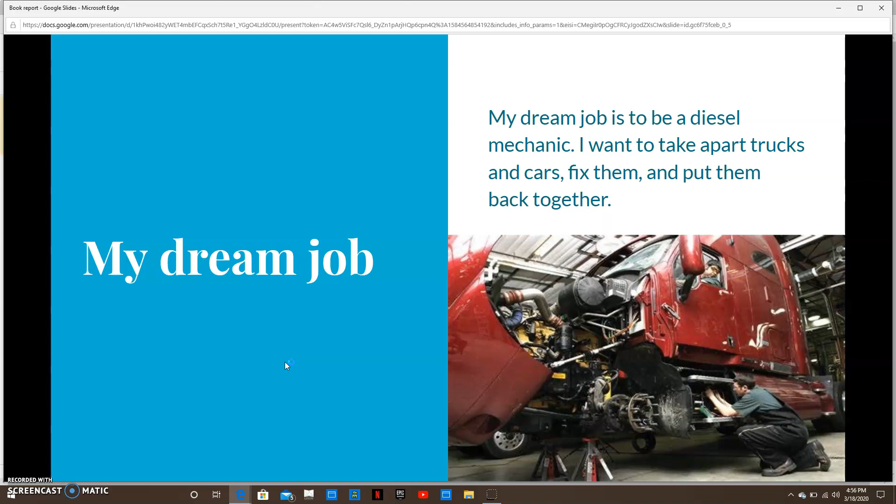How much do diesel mechanics make? They can make around $4,000 every month and have a yearly salary of around 70,000.

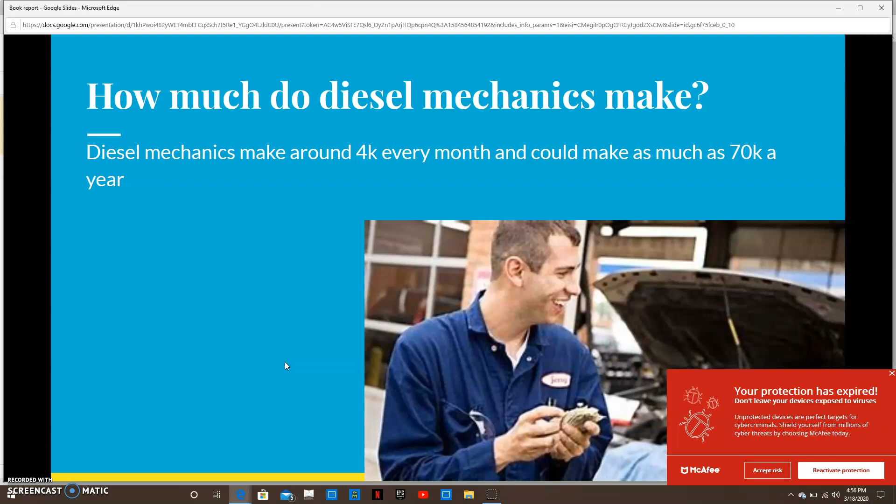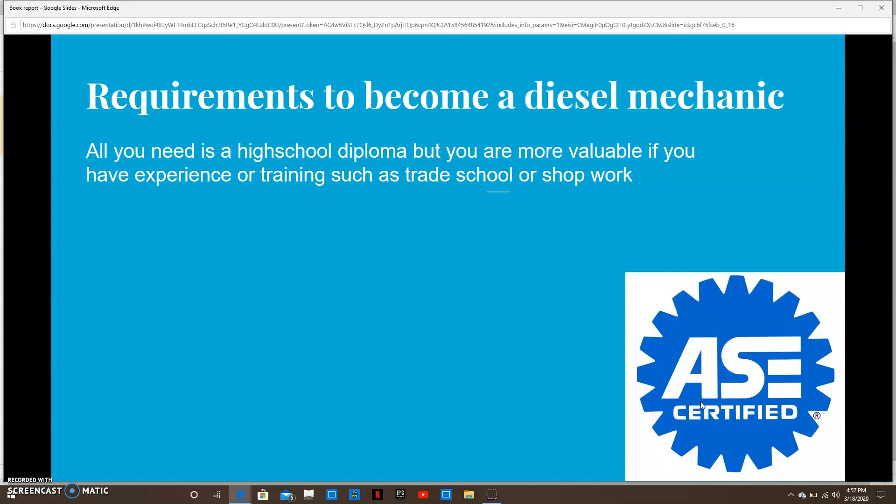Some of the requirements you need to become a diesel mechanic: all you really need is a high school diploma. But if you have more ASE certificates and have more experience or schooling, you get paid more and you're a better mechanic.

Why I want to be a mechanic is because I've always been a hands-on learner, and I've always had a thing for cars. I've always loved cars and looking at cars, and they're just really interesting.

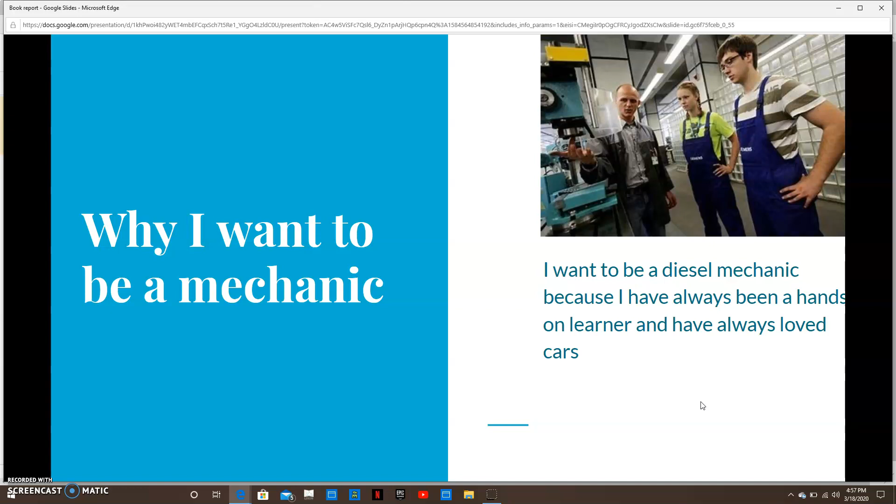When would I use math in this job? I can use math when timing and tuning the cars and setting the right air pressure. The timing refers to making sure the engine compression and ignition fire at the same time, which makes the engine run correctly with the right timing. This is important to make sure the car is running correctly.

The steps that you use math in this would be: you remove the valve core, taking out this little part from the valve stem, which makes it so air can flow through quicker and fill up the tire faster. You take this out before you fill up the tire, and the bead will seal around it, and then you have to keep the air chuck on it. The air chuck is what you use to fill up the tire, pumping air into the valve stem.

What you'll do is fill it up to around the right pressure, 5 or 7 psi over the recommended limit. Once that's done, you hurry and leave this on there without pumping more into it, then get your valve core ready with the tool, and as soon as you take the air chuck off, you hurry and put the core in so it doesn't lose as much air pressure.

Usually while you take it off, in the about 1 second between taking it off and putting the core in, you lose about 5 pounds of pressure, 5 psi. Once that's done, you just want to make sure you fill it back to the right pressure and make sure it's all good.

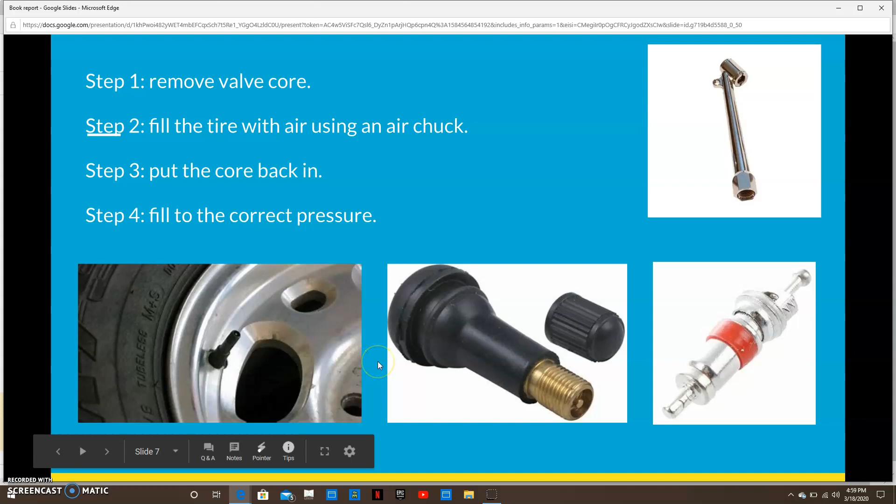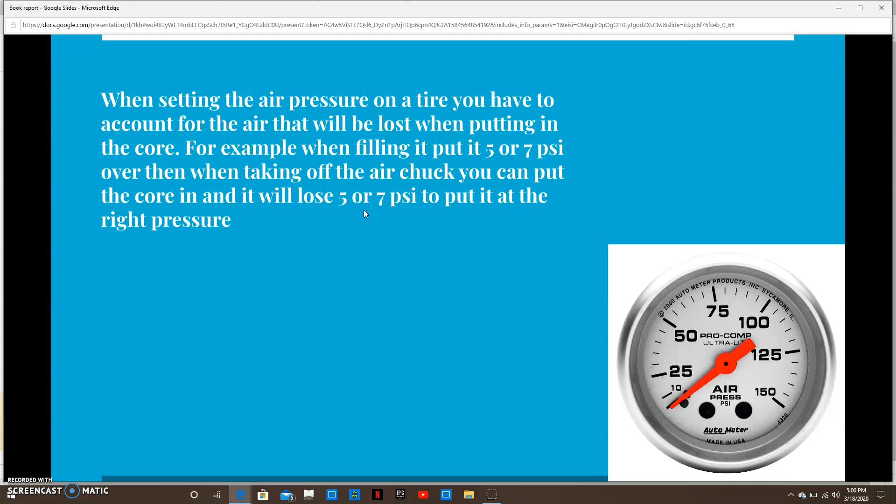When setting the air pressure on a tire, you have to account for the air that will be lost when putting in the core. Like I said, you fill it 5 or 7 psi over, and when you take off the air chuck, you'll lose about 5 or 7 psi, so you've got to make sure it's at the right pressure. The equation is: for every 1 second the core is removed, leaking out air, 5 psi is lost.

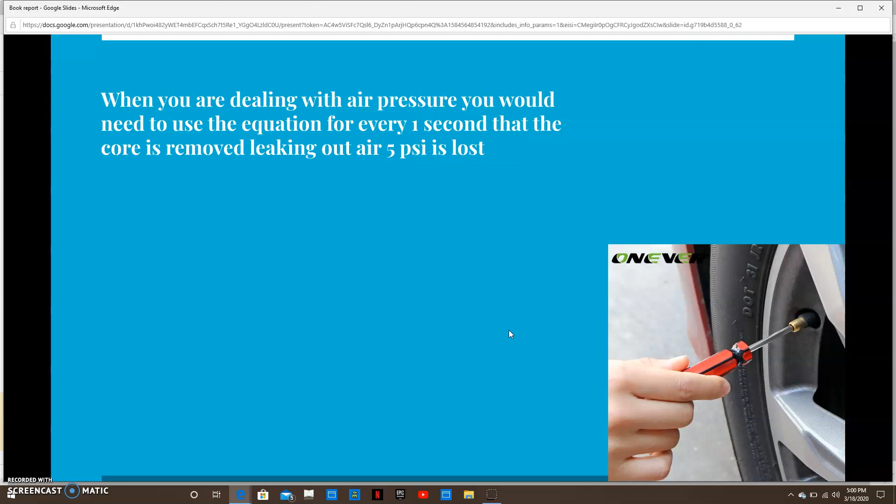For example, if the correct tire pressure was 40 psi, I'd fill it up to 45, which would give me 1 second to take off the air chuck and put the core in, having it be at around the right pressure.

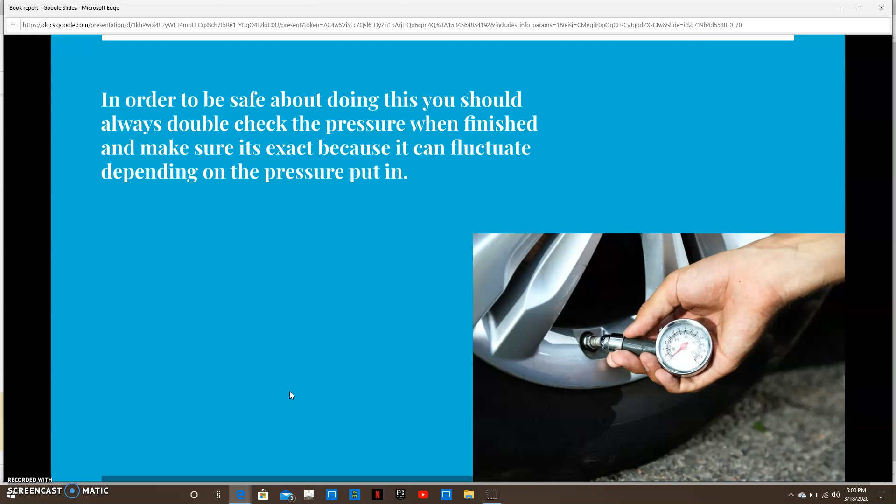To always be safe, you have to double check the pressure when finished to make sure it's exact, because it can fluctuate depending on how much pressure is put in. Like if it was at 60 psi, the air would come out faster, which means you'd have to account for that as well. And that's the end.